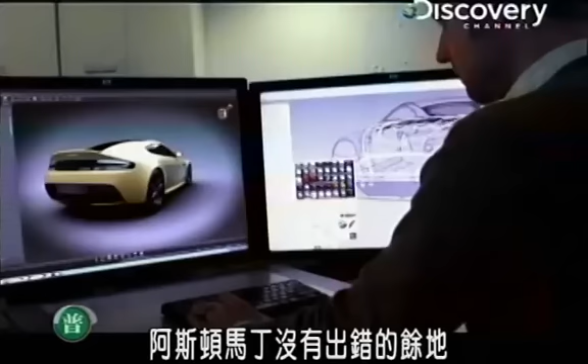To survive, they need a new machine. We are it. There is no helper or big brother. A small but dedicated team looks to the past, only to find salvation in an old American hot rodder's trick. I was absolutely adamant, we're going to make this do 200 miles an hour. A uniquely English machine called the V12 Vantage S.

In 2007, Aston Martin stands as one of the top European sports car manufacturers in the world. Winning both on the racetrack and also on the showroom floor. We were really into our stride and producing over 7,000 cars. And we established the DB9 as the new icon, the super cool GT. We got the V8 Vantage in production and we established what we call the new era.

Almost without warning, the world economy collapses. Overnight, Aston Martin loses its empire. Some challenges in the market for sure from 2008 onwards, a global recession. It's a global recession that sends car makers around the world into a tailspin. For Aston Martin, it's now do or die.

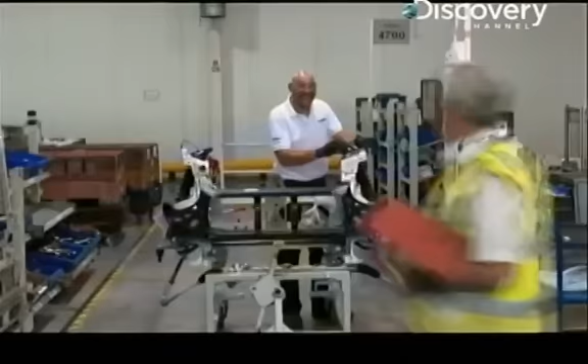Now, for the first time in over 20 years, its success or failure rests solely in British hands. They have to fight for their own little niche. They don't have economies of scale, which other manufacturers have, so they have to pay more for every single part that they develop for their cars. So what Aston has done is sort of repurpose the same architecture and their same engine to make new things.

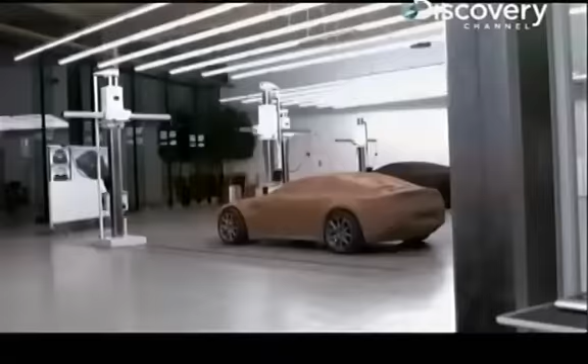Lead designer Marek Reichman itches to push the brand forward. We've always had a policy of thinking about what could we do next with the assets that we have around us. What would be exciting? With limited money to build a new machine from the ground up, Reichman has to do a lot with a little. The idea was, well, what if we put the V12 engine into the Vantage? How could we make that work?

Squeezing the brand's biggest engine into one of its smallest and oldest chassis is a daring proposition. Yet the notion ignites a passion for speed. That genesis, absolutely, of Ian coming along saying, hey, we have this idea, and we talked together, said, this will be an amazing car to do. The engineering team quickly sets its sights on creating a bold goal.

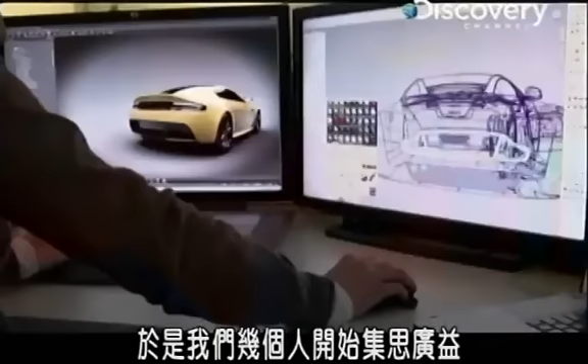When we're laying down the targets for the V12 Vantage S, I was absolutely adamant to the guys, we're going to make this do 200 miles an hour. An outrageous top speed isn't the only objective. We wanted to get below the magic 4 seconds of 0 to 60. So it really came out of a small group of guys free thinking. But once we got hold of the concept, we thought, yeah, this is a serious project and a serious car.

With the performance targets set, the design team faces a unique challenge. How to take an existing and universally applauded supercar and fit a substantially larger engine inside it. We had a VMAX target. All those were defined. We create the sketch, and that sketch has to look like an Aston Martin. Making an Aston Martin look like an Aston Martin is no easy task. Your first reaction has to be, it's beautiful.

It takes time to find the right balance of beautiful. If I was to describe the thing that we had to win, it was about making sure that proportion was absolutely perfect. So the fight was for perfection. It's a distinctly British form of perfection that starts in a very old world way. All Aston Martins start with a sketch. In my mind, that immediately starts to give you a proportion.

Within that proportion, you have to fit the person. So you can then start to realize where the front wheel is, where the rear wheel is, where the occupant will sit, and you can start to sketch. You can start to have an idea of the form, the language of the car. That language is the key to Aston's rebirth. And it's all due to a time-honored process. That sketch then becomes a three-dimensional scale model.

Designers design a lot of stuff on computers, but you can't touch what's on the computer screen. But you can touch what's in clay. At first, they create an 8th-scale model. It's a fast way to bring the language of the car to life.

At that point, we can then start to scan that three-dimensional form. The CAD doesn't understand whether this is a scale model or not, because we can convert the scale to full size, so we can turn a 10mm square into a 100mm square. So immediately then we have a surface.

Once the surface becomes digital, the team can look for the most minute imperfections. Our role is to get the scan data and the nuances that are done physically by the clay modeler. Our job is to refine those. Then we go back to the physical world to make sure what we've done is correct.

Modelers work tirelessly to perfect the shape in the real world. Handcrafting each sensuous curve in clay on a life-size model. I'm not a designer, but it's all about their proportions. It's all about the way that car sits with that big long hood and just the elegant, simple lines that go across it. They're just timeless.

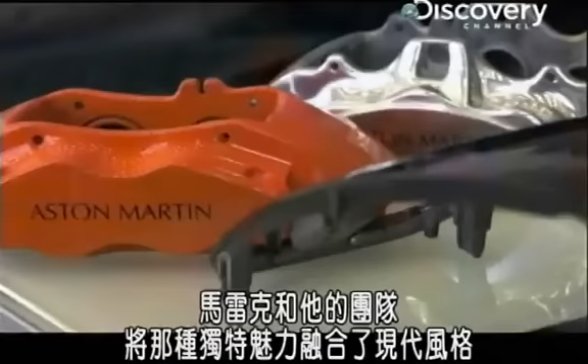They're incredibly powerful, but they're also incredibly comfortable and beautiful. It's a car to be seen in. It's the understated gentleman's Ferrari. Marek and his team blend that unique appeal with a modern style. That becomes the battle to make sure we get the best looking car that is going to be timeless design, a future classic. So it's really about making sure everyone understands the direction and the goal.

That goal is a contemporary reinterpretation of an old American hot rodder's trick: take the biggest, heaviest, and most powerful engine and drop it into the lightest chassis. A 565 horsepower engine called the AM28. And that's just the ancient hot rodder's recipe for making an awesome sports car.

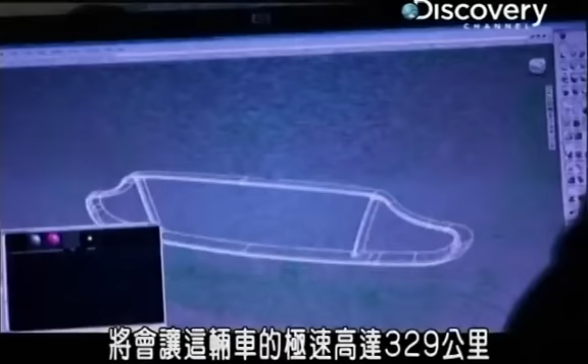Everybody loves a good stick the biggest motor in the smallest car you got. And sometimes it can be fun, sometimes it can be a little bit too much. In the case of the Aston, it's probably both. Engineers predict that the 4 extra cylinders will propel the machine to a 329 km/h top speed. There's only one problem. The engine doesn't actually fit.

In an ever-changing automotive landscape, Aston Martin looks to turn heads with a new, hot rod-inspired supercar. Since Aston Martin doesn't have a big car maker to support them, they have to do everything on their own. It takes so much money to develop a new car. And if you don't sell 4 million of them, you can't recoup that development cost.

They can't afford to make any big mistakes because that could cost the company everything. If Aston misses on anything, I think we're going to have to say goodbye to them. So how does an independent car maker expect to compete with some of the largest car companies in the world? The answer lies in the quiet green hills of Warwickshire, England. Welcome to Gaydon, the beating heart of Aston Martin since 2003.

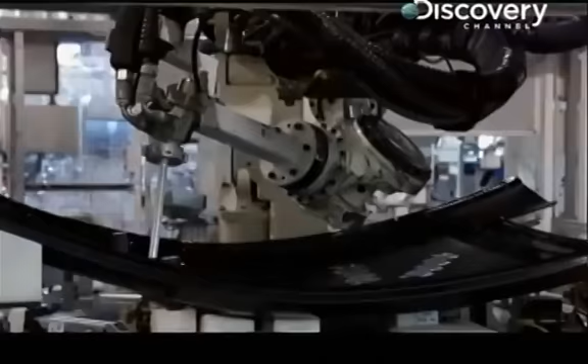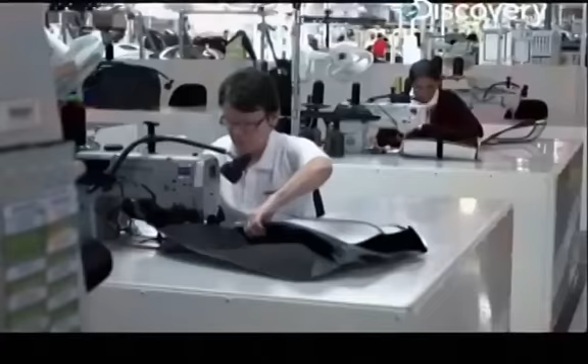It's one of the most technologically advanced automotive factories in the world. It's a facility where people are manufacturing these beautiful sports cars with great passion. 54 acres of space-age technology paired with British refinement. It's quiet, it's clean, it's very, very high-tech. Every phase, from design to production, takes place on a single campus.

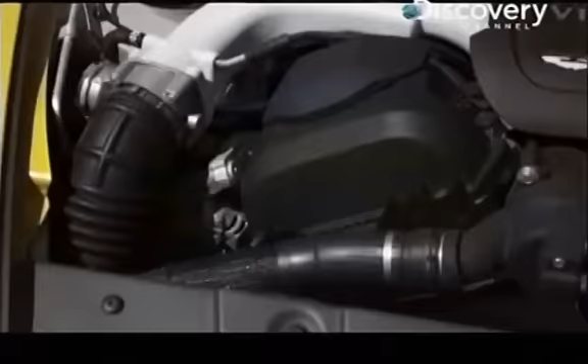It's here that engineers and designers struggle to solve the critical problems facing the project. The front end of the car was designed around a V8 engine, so the first challenge is actually getting the large engine to fit in the space. Engineers digitally comb over every single millimeter of the engine bay to find a solution. The big challenges were the packaging of an engine which had 4 more cylinders than the previous engine. Just to give you an example of that, that's about that much longer, within the same wheelbase.

When engineers first digitally drop the V12 engine into the V8 chassis, they immediately have a problem. So you can start to see some of the pinch points here, and just here on the front of the engine, as the bonnet dives over, we're in a tight pinch point here. A pinch point is where 2 pieces don't fit correctly.

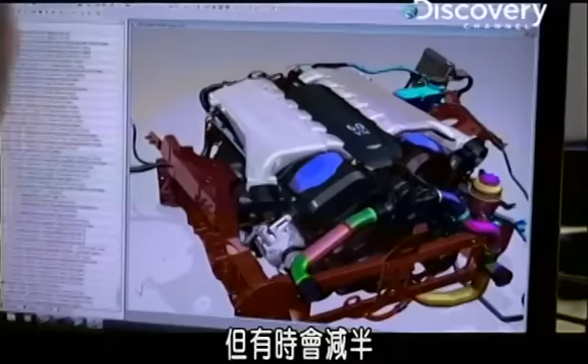Getting the engine to fit comes down to just 12.5 millimeters. A little less than the height of 2 iPhones stacked on top of each other. Usually we'd look for 25 millimeters, but in some cases we've halved that. In the end, 12.5 millimeters are the key to bringing a new machine to life.

The pressure on Aston must be enormous because they have such limited resources and they have to keep coming out with different things. Any failure could mean the end of the marque's illustrious legacy. One of the challenges that we believe we always take on here is doing the impossible. With their reputation hanging in the balance, and perhaps their solvency, the Aston Martin design team boldly surges forward.

As a small independent car company, they're a lot more agile. They can do fun things. They can do crazy things like that car. Things they wouldn't get through a regular car company's processes. That's something that we would say, well, of course we can do it. We don't have to follow this rule. We don't have to think in this way. We can make it work. It's a unique form of bravado from a company that's no longer willing to keep a stiff upper lip.

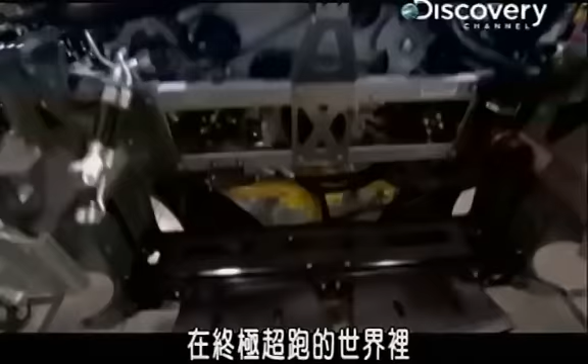But if they built some sort of car that wasn't really an Aston Martin and they spent a lot of money on it and it didn't sell, that could kill the company. This small independent is about to go toe-to-toe with some of the most powerful companies in the world. But only if it can learn to control something that you can't actually see. In the world of extreme supercars, powerful engines always get the glory. But it's the air surrounding them that provides the greatness.

Literally, as you shoehorn your foot into a very tight shoe, that's what we tried to do with the V12 Vantage S engine. Shoehorning the larger V12 into the chassis is just the first step. The real key is to manage the airflow around and inside the machine itself. And we've got a lot to come through the engine bay, what we're going to do with all that air that's going into the front of the car. Controlling the air creates 3 distinct challenges.

First, the machine needs to be tuned so that it's stable at high speed. At 200 miles an hour, an airplane can take off. At 200 miles an hour, a car can take off too. So you want to make sure that the aero package is right so that the car stays on the road.

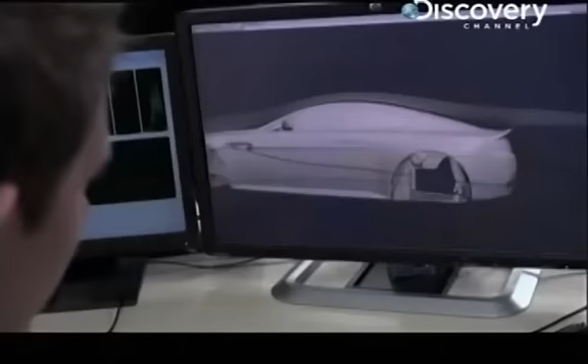Model made up of over 60 million cells to find the best way to move the air. The first step is to map what you can't see. Red is good. That means there's lots of energy left in the air. So this is us before we get to the car. And as the car passes through the air, that energy is transformed into heat rejection.

Air particles pass through the car in just 50 milliseconds. In that 50 milliseconds worth of time, that air has to cool the brakes. It has to travel around the car without causing too much drag. And it also has to make sure that the car is absolutely planted at speed.

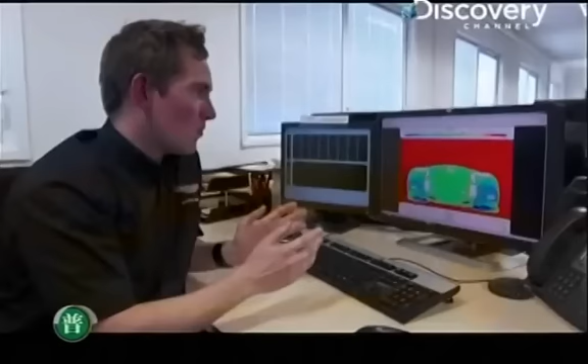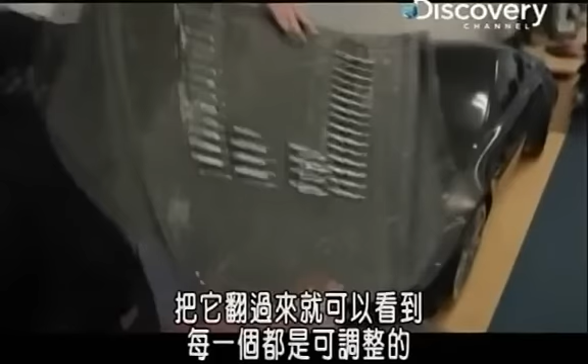What we've got here is a prototype bonnet. We've got this bonnet here, which has all got these extra louvers in, which we derive from motorsports experience. These parts in here can be changed. If I flip it over, you can see each one of them is tunable. So we tuned these to get the maximum airflow through them.

Whilst it's running at high speed, it draws more air out, and that gives you a better head start. If you keep the engine cool in the first place, you haven't got such a mountain to climb when you actually stop. But also, when the car stops, it allows all that heat that would build up inside the engine bay to come out. At speed, managing the airflow is critical and complicated.

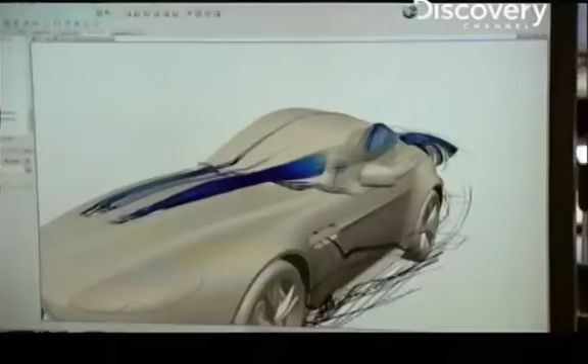Because air travels through components at pressures 1,000 times greater than the capacity of the human lung, how the team channels it throughout the vehicle makes all the difference. We've got to separate that out between how much goes into the engine to give us the extra power to reach the top speed, and how much we need to cool the engine. You're going to heat the brakes up to 700 degrees. We've got to have airflow pumping into those wheel arches to cool that down. So it's this finite balance of trying to achieve all those things with all the air around the car.

From an engineering standpoint, the V12 Vantage S is an engine-heavy dragster, just like the 1950s American hot rods that inspired it. V12 Vantage is a real engineer's car. There's a bit of hot rod in there because it's the big engine in the smaller car. One of the keys to a great hot rod is how it sounds.

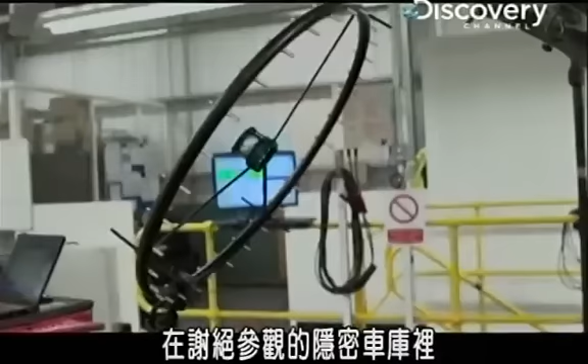Inside a hidden garage, off limits to the public, engineers use a high-tech camera system with 32 microphones to visually chart the engine's audio signals. This lets the team precisely tune which sounds occupants hear and which they don't. The camera records data at 96,000 times per second. They then use a color map to identify the noise characteristics, with purple being the loudest sound.

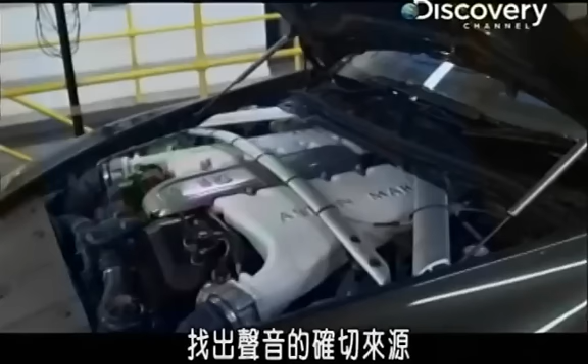Finally, they combine the camera imagery with the audio data to pinpoint exactly where the sounds originate, sounds which help intensify Aston's unique exhaust note. Absolutely beautiful noise that you only get from a 12-cylinder engine. I mean, they don't sound like anything else.

The problem is, Aston Martin doesn't make hot rods. They make exquisite supercars laced with sophistication. Today's global buyers expect more than just a big engine. Anybody can make a fast car these days. What Aston really needs to do is appeal to the emotional side. There's an understated elegance about an Aston Martin. It's maybe more about wearing the label on the inside than the label on the outside.

It is the gentleman supercar. First of all, they look the part, they sound the part. They're a little bit more restrained, but they are no less serious when it comes to performance. So how do you transform a hot rod into an Aston Martin? And there were some really long nights on that, saying, how do we make this work? How do we get that mix of refinement with a little bit of rawness in there? The trick is over 40 years old.

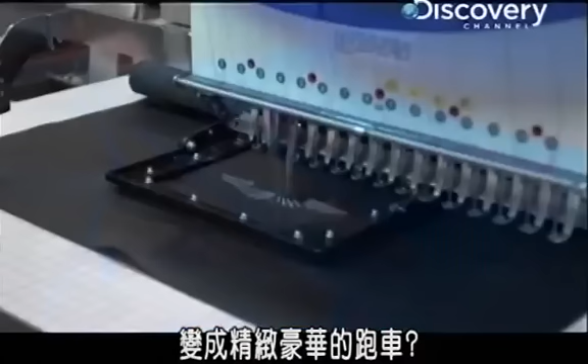A fateful discussion over a cup of coffee has led Aston Martin to put their largest engine into their smallest chassis. The question now is, how do they transform this modern hot rod into a refined luxury vehicle? It's always about pushing the technology, pushing the innovation of the material. High-tech and handmade are two staples at the Gaydon factory, where over 200 man-hours go into the assembly of just one Vantage.

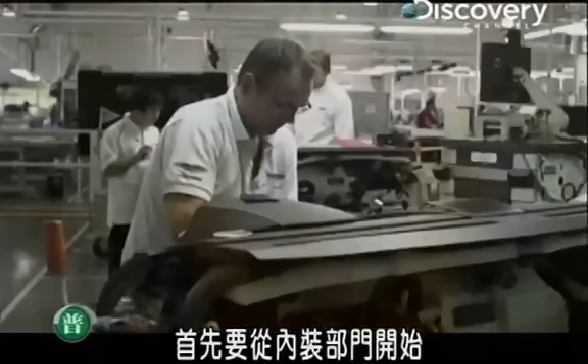The process begins in the trim department. This is Gaydon Trim Shop. This is where all the leather panels are all stitched together. Each Vantage interior utilizes 6 full hides of leather. These are Alcantara panels. These have just come from the sewing area. The parts are now being laid out into the spray booths, and the adhesive is now being applied. Once the glue is sprayed, the leather workers have just 4 minutes to apply it to the plastic.

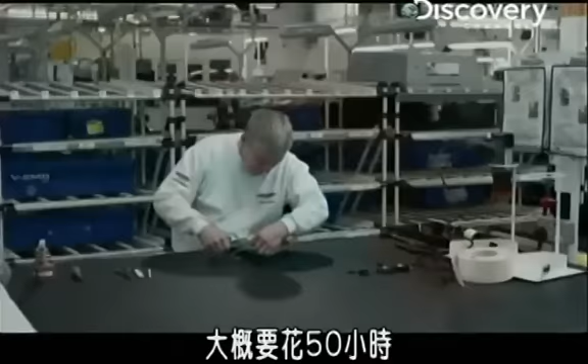Now the adhesive is no longer wet, it's just tacky. Once you put the two parts together, it forms a permanent bond. There are 50 trimmers, and they'll make over 300 parts a day. It takes roughly 50 hours to make all the interior trim pieces for just one Vantage. And the most important tool has a name that harkens back to the Stone Age. There is one major tool. That tool is called a bone, and that is the one that pretty much does it all.

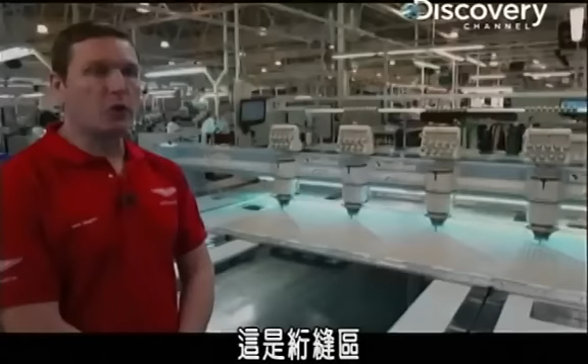The leather parts might be made very traditionally, but if you order a bespoke Vantage, the stitching is absolutely high-tech. This is the quilting operations area. This is where our bespoke quilting is produced. The quilting machine looks fast. It had better be. There's more than 1 million stitches in a Vantage. While old world artisans spend 2 days crafting the interior, it takes just half as long to build the space frame.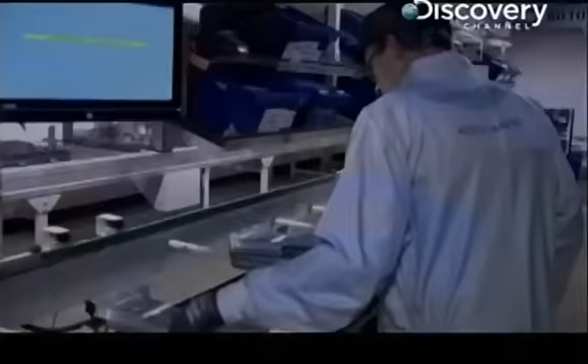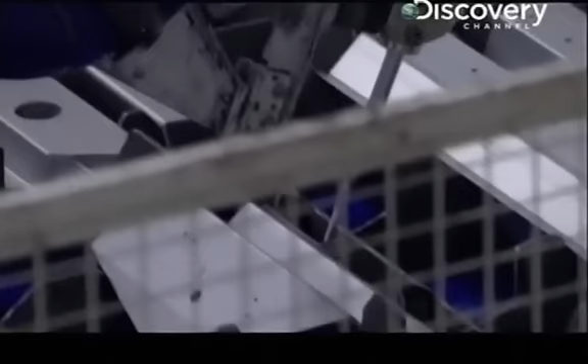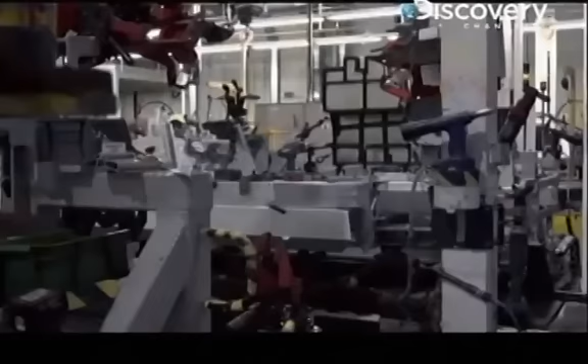Each panel or casting arrives at the factory having already been superformed, a process where metal is heated to extreme temperatures before being stamped into a final shape. Robots apply epoxy adhesive. The adhesive is both more accurate and stronger than a traditional weld. The entire space frame is cured in an oven at 185 degrees centigrade for over 30 minutes. A slow burn for a fast machine.

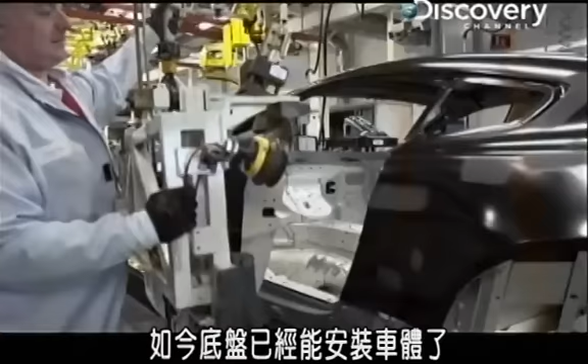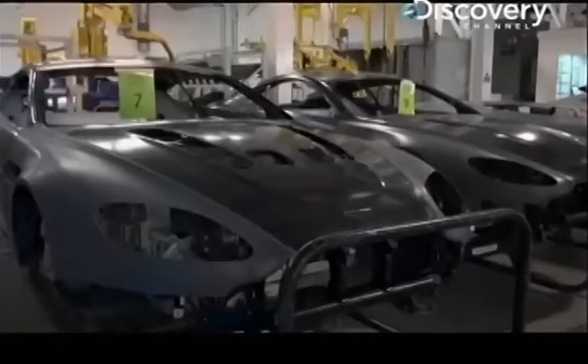Now the chassis is ready to receive its bodywork. Then they fit the doors, front quarter panels, and bonnet. Each body is inspected by hand. Then it's time for a splash of English colour.

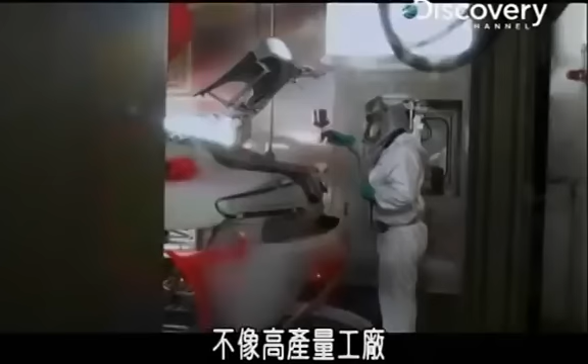We're now at the start of the Aston Martin paint process. As you can see, we've got the car delivered into paint. Quite a different car as to what you're going to see at the end of the process. Only at Aston Martin, that colourful demeanour is just as special as the machine itself. The full paint process takes on average 50 hours per car. Unlike high-volume factories where cars are painted in batches of the same colours, at Gaydon, each vehicle is painted individually. It's not efficient, but it is effective, even though they actually use very little paint.

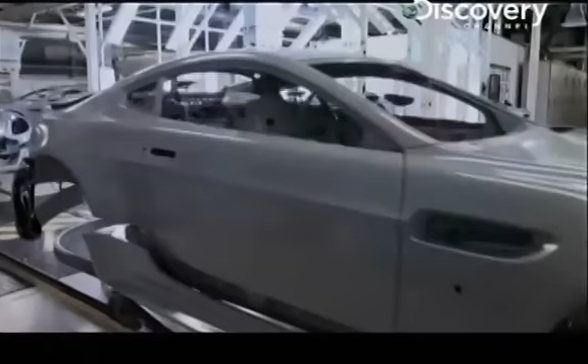120 microns of paint will be added to the car, of which we will remove 30 microns in our polish process to make it a mirror gloss finish. So in theory, you have got something the thickness of that on the car finished gloss level. That shine starts with a single coat of primer. Now it's ready for the prep line. The idea of the prep line is we look for any imperfection before base coat is applied. We have a very big ethos with prep work.

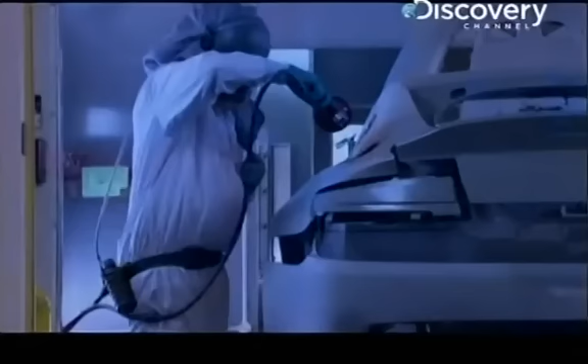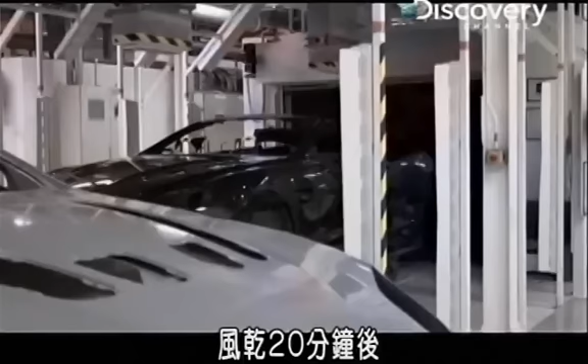Once the car is primed and prepped, it's ready for paint. This car will have base coat applied in the booth there. It will then be dried for 20 minutes, moved into a flash-off oven, and then we apply the clear coat by hand. Each Vantage then receives 2 layers of paint and 2 layers of clear coat. Some done by robots, some done by hand.

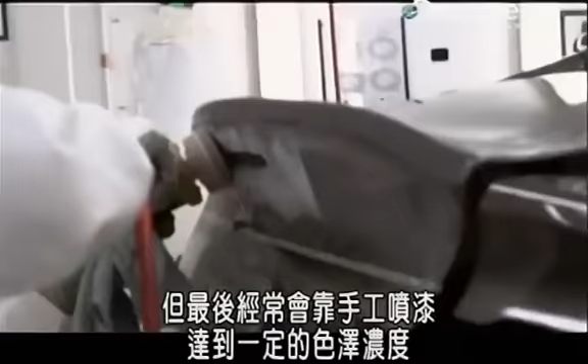Paint shop has a degree of automation. We've got some robots in there for spraying, and lots of hand finishing to get the depth of paint finish onto the car. The machine is ready to be polished. Very different to high volume, run-of-the-mill factories. You will not get this process.

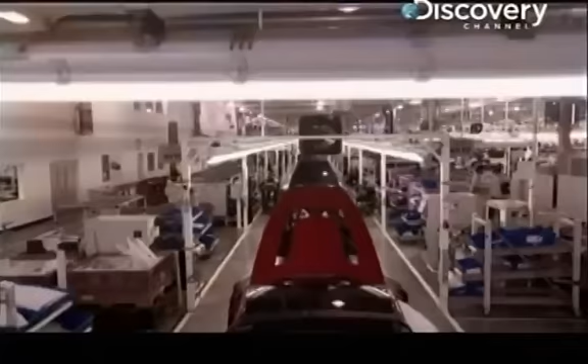Once painted, it's time to put the machine together. In the final assembly hall, it takes 42 stations to build a Vantage. We're currently on the first part of the assembly line, trim 1. Throughout the rest of this line, we're fitting some of the key parts that your average driver doesn't really think about on a day-to-day basis.

It's a very classic way to build a supercar. And the only way to build an Aston Martin. Superficially, it can look very similar to a conventional car production process. It's still very much a craft-based production system.

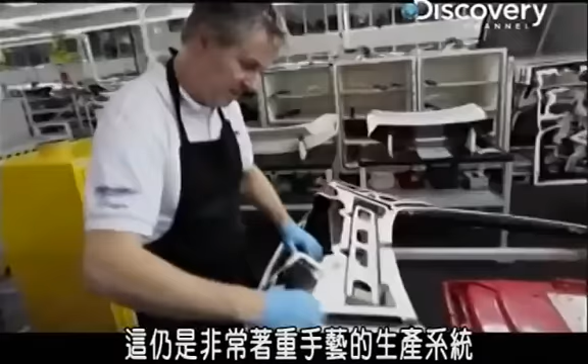Rear deck lids are pre-assembled and then installed. Finally, the car is ready for its massive handcrafted instrument panel. The technicians will use this big device here, this assistor. It's a very heavy part, the IP, then pick it up and mount it to the vehicle.

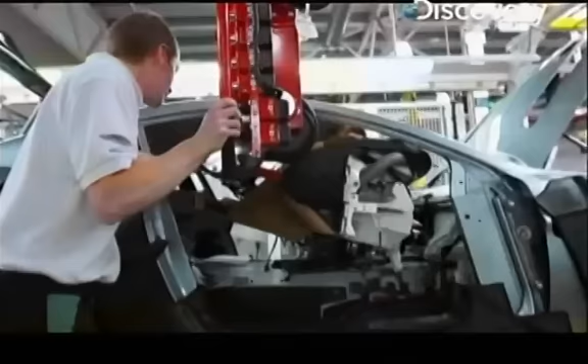While the majority of the work on the line is done by hand, the newest addition to Gaydon is completely automated. The robot places adhesive on the edge of the windscreen and is far more precise than a human. Well, it's the first part of automated equipment that we have on this line, and we've done it solely to help us improve quality.

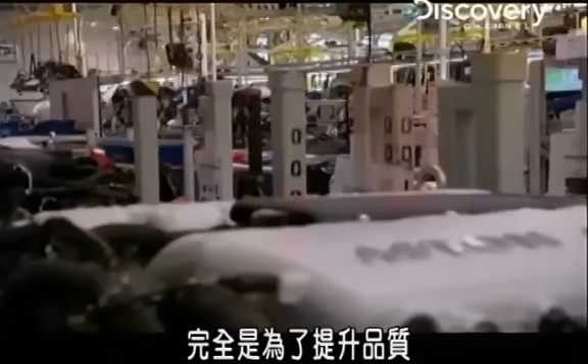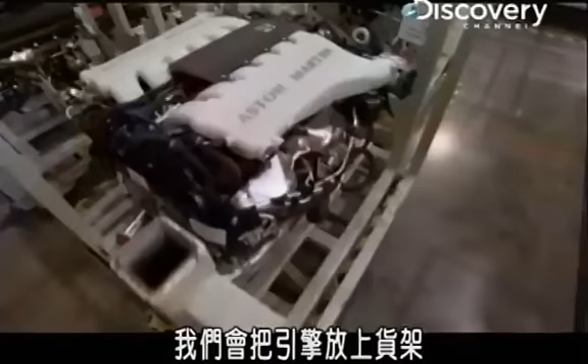Quality that meets performance on an adjoining sub-assembly line, where the powertrain begins to come to life with the naturally aspirated V12 engine. We're now in the powertrain sub-assembly area. Here you can see one of the V12 engines. And what we do is we take the engine in a pallet, we load it up like this, and then we carry it over to the first part of the assembly process.

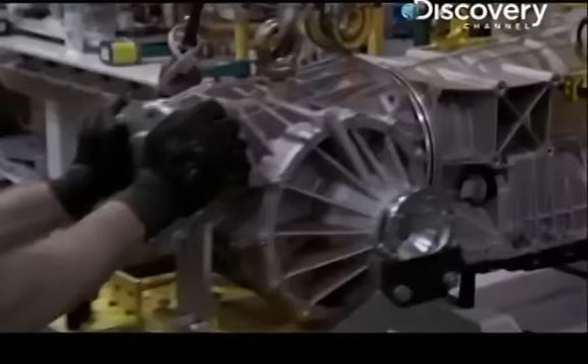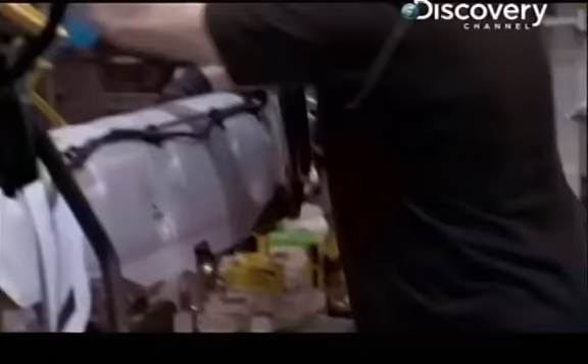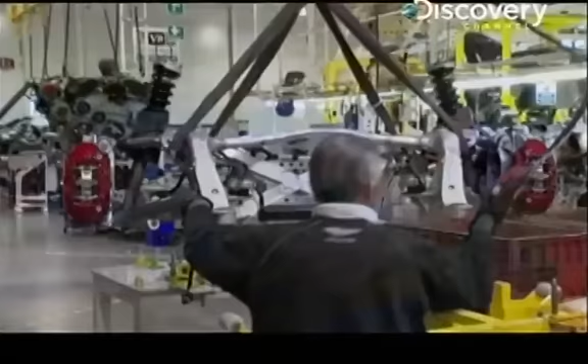Where we assemble the engine to the torque tube, and we then have the gearbox at the back of the vehicle. They continue to build up the drivetrain by bolting on the transmission, followed by the catalytic converters, then the heat shield, rear disc brakes and suspension.

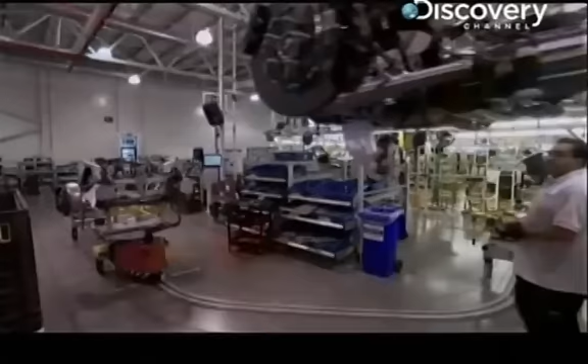So we fix what we call the front corner units. So that's the assembly of the brake disc, the brake parts and the suspension parts, before we then marry it up to the car. The front suspension is built as a separate sub-assembly, where they bolt on the 398mm carbon ceramic disc brakes. Once it's completed, it's joined to the rest of the drivetrain.

We need to fit the radiator on the front of the engine unit. By having the engine, torque tube and gearbox arrangement, we can get the optimum weight distribution in the car, which is so important for the handling of the vehicle. 85% of the weight distribution sits between the wheels, helping agility on a track. The 7-speed transmission launches the machine from 0 to 100 kilometers an hour in under 4 seconds.

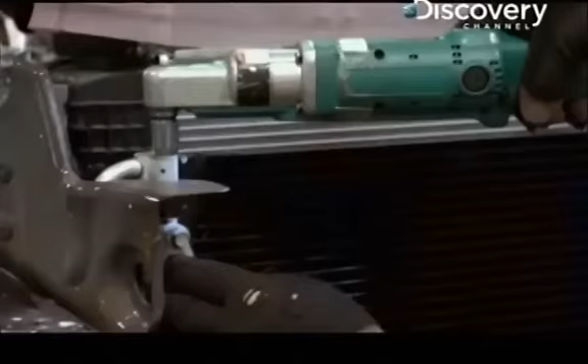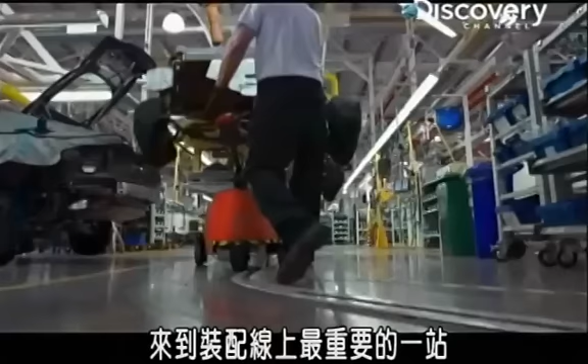Now it will take the team at Gaydon 40 minutes to install the single most important piece of the Vantage. Taken over 100 man-hours for the fastest production-based Aston Martin ever to get to the single most important station on the line. The bit that I like the best is what we call the marriage station, where we take the whole of the driveline of the car and we marry that up into the body structure of the car.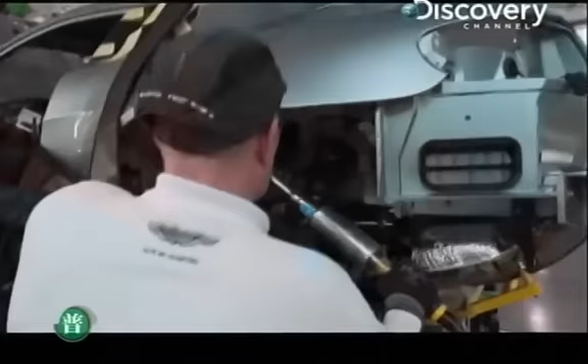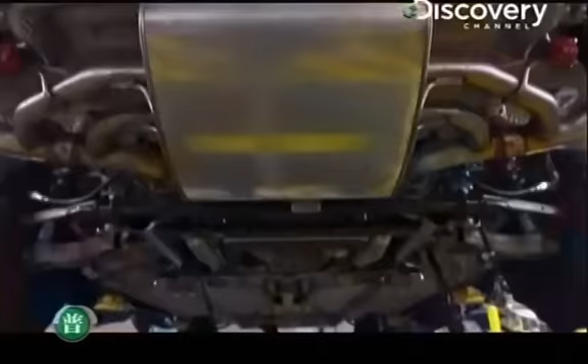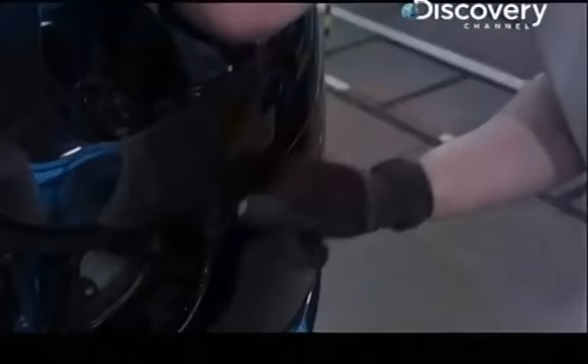Even though the machine is now married, it's not quite ready for a honeymoon. The Vantage still needs some key bits of kit, like exhaust pipes, the front bumper. There is no line that intersects between the lamp and the fender. It's embedded like a jewel set in a ring. Jewelry that takes a surprisingly long time to install. It takes 15 minutes to set just one headlight. Then they place the taillights.

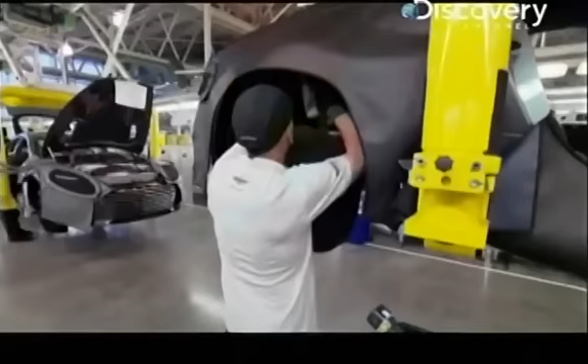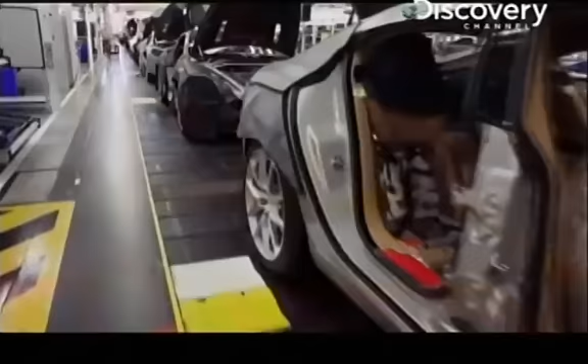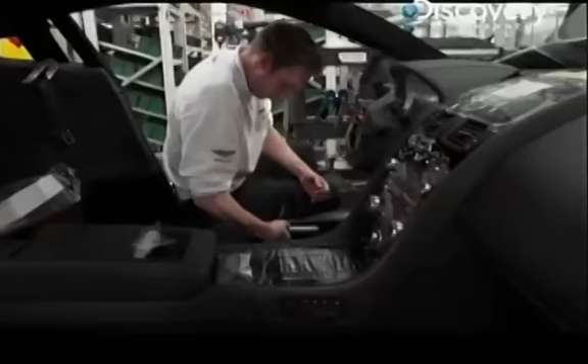Clearly these cars are going to need some wheels. And after that, we build up the interior trim of the vehicle. The Vantage is ready to move to the very last line. And trim 3 is around fitting all the parts of the car that you touch and you feel when you're inside the car. Front seats come to the line fully assembled from the trim shop. Then the hand-sewn steering wheel.

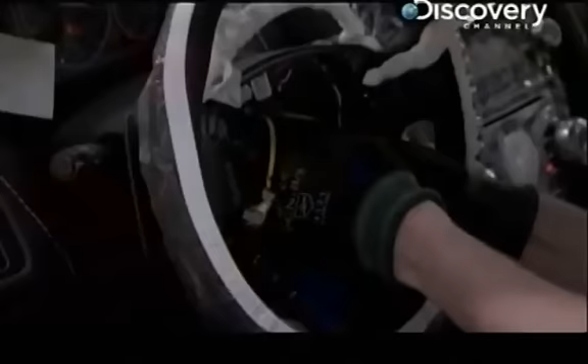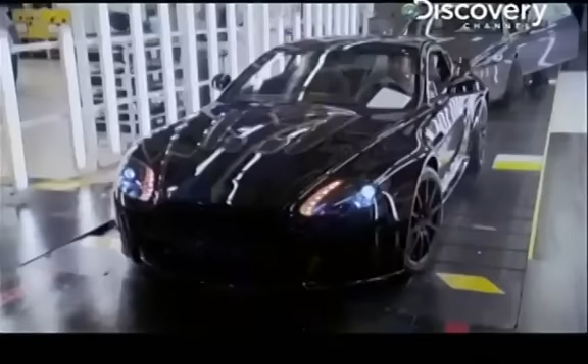Doors are brought to the line and carefully installed. Once we've fitted the doors, the car will complete the last couple of stations on the assembly process. As the car nears the end of the line, there's one more key step. The famed Aston Martin wing. So precious that they keep it locked up until it's ready to be installed. This is the only badge or wing left in the automotive industry made by a jeweler. So we know this is very special.

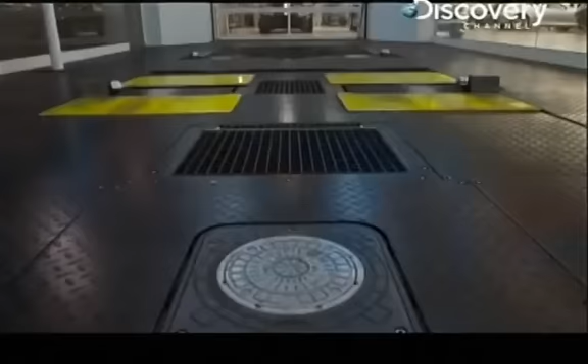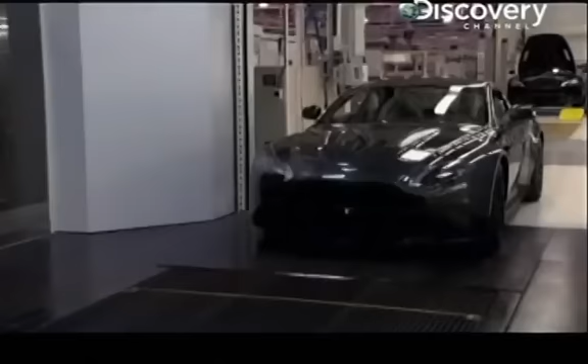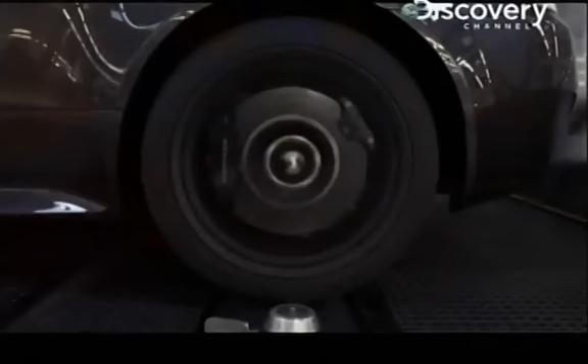Before a completed Aston Martin can leave the factory, it must first take a few laps around the test track. This is part of the off-tracks facility. This is our new rolling road. It's going to get up to about 70 or 80 miles an hour. Off-tracks is where each vehicle is tested to meet quality control standards like wind, noise and waterproofing. By doing these test processes in a controlled environment, we can make sure we do it the same every time. Then building a Vantage literally hits a bump in the road. In the hydropulse area, they simulate road inputs using hydraulic actuators to find squeaks and rattles.

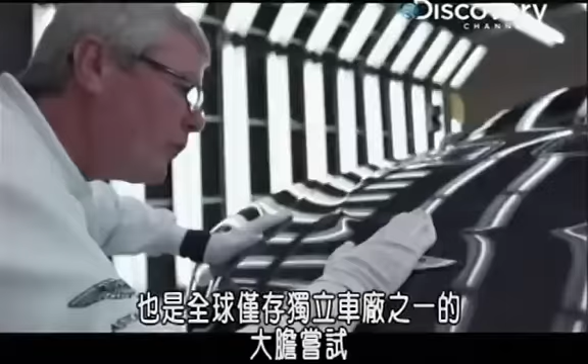The very last test is a final inspection, where we spend about 20 hours specifically checking over the car as it's produced and at the very end of line to make sure it's absolutely perfect before we ship it on to a customer. It's taken almost 10 days of assembly to complete the V12 Vantage S. The fastest production-based Aston Martin ever built. And a bold gambit by one of the only remaining independent car makers in the world.

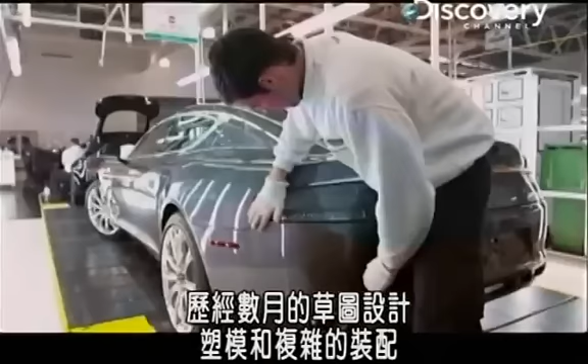In a hyper-competitive automotive world, Aston Martin must do a lot with a little in order to stay relevant. Building a car on your own is expensive. If they build the wrong car that doesn't sell, they're a company that's going to be in a lot of trouble. Now, after months of sketches, sculpting, and intricate assembly, a risky idea is finally ready to enter the real world.

The first thing you do when you get into any Aston Martin is go, how do I start it? You have this key that is made out of crystal. And you put it in a slot in the dash and you press it in, hold it, and then the engine starts. Aston calls it the emotional control unit. You could look at it as gimmicky, but when it's that beautiful, it doesn't matter. It's a little bit of theater, but my God, if you're going to do theater, you might as well do it on a car that looks like that.

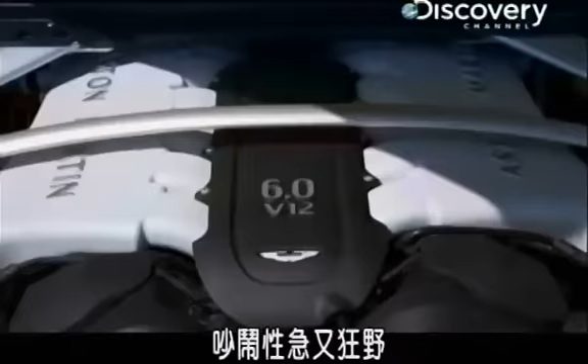You fire the car up and it just wakes up like it's been in some deep slumber and it's really pissed off that you just woke it up. And then you go out driving it and more of that happens. It's a decidedly angry form of British sophistication. Astons are British Camaros. They're loud, they're brash, they're rough. What Aston's done brilliantly over the years is taking a small number of ingredients and making a lot of different dishes with them. This V12, for example, dates back to the year of the flood. It's really old.

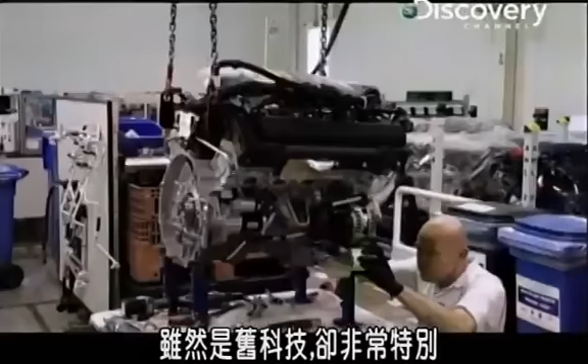What makes the AM28 so unique isn't new technology, but rather old technology at its best. Thank God it's not a turbo. Downsizing an engine and putting turbos on it makes easy power, but I call it cheating. It's just too easy. There is a charm and a personality that normally aspirated engines have. And that's something we're missing out on. To have a naturally aspirated engine these days is actually becoming kind of rare. It's old technology, but there's something kind of special about it.

It's an angry, angry car, and it's really visceral and really powerful. It really speaks to you in that way. And every time Aston comes out with a new version of this engine, you think, oh, they're beating this dead horse. Except the horse ain't dead. This horse is faster than the previous one. It sounds better. It's more powerful. It responds better. The V12 Vantage S is the most mainstream Aston to ever crack the 330 km/h barrier.

We sort of dialed a few things up, maybe from 10 to 11 in some cases, and we put more power and performance into the car. 205 miles an hour is incredible. It's a completely different world. This is the highest performance version of a high performance version of a high performance version of the Vantage. Every time you step up the ladder, you get a little bit more jewelry and spoilers and stuff like that.

It's an extreme way of building a car, and that's not for everybody. You throw fuel economy out the window, you throw everything that most people really care about on a daily basis out the window and you build an extreme car that's loud and powerful and raucous and fast. An extreme car with extreme performance.

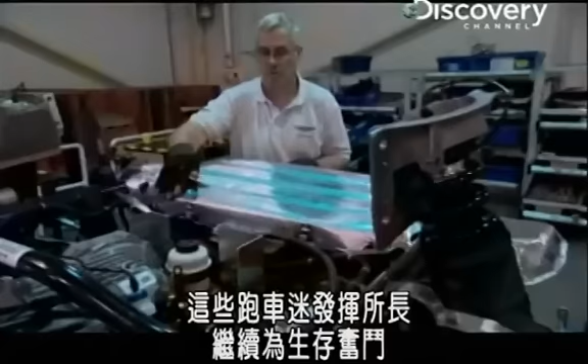If you take one drive in one of these cars, you realize that the people who are working behind the scenes at Aston are clearly sports car guys. Sports car guys who continue to battle for their very survival by doing the only thing they know how to do: build beautifully exotic supercars. At the end of the day, no matter what I drive, at whatever speed and whatever track, I always come away from the Aston thinking, God, that's more fun than anything else.

I pinch myself every single day still after almost 9 years that this is not a job, it's a vocation, it's something which is very hard to describe the feeling. Just the sensation of what you're actually achieving in terms of the heritage, the future of the brand of Aston Martin. They are the most communicative sports cars on the market now, and they show no signs of moving anywhere away from that. If that means there's no Aston in 20 years, hey, at least we had some of the best cars now.